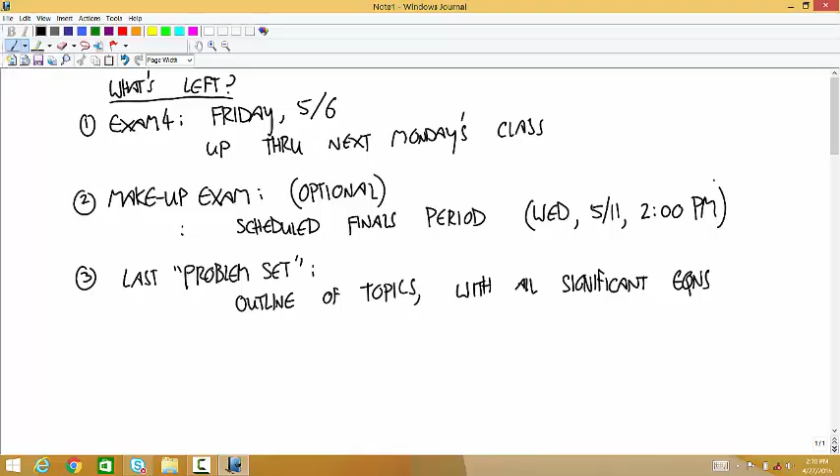Is it true that if we get 100% on exam 4, we don't have to retake anything? Yes, that is correct. If you get 100% on exam 4, there's no reason to do the makeup—basically you're going to replace your lowest score with 100%.

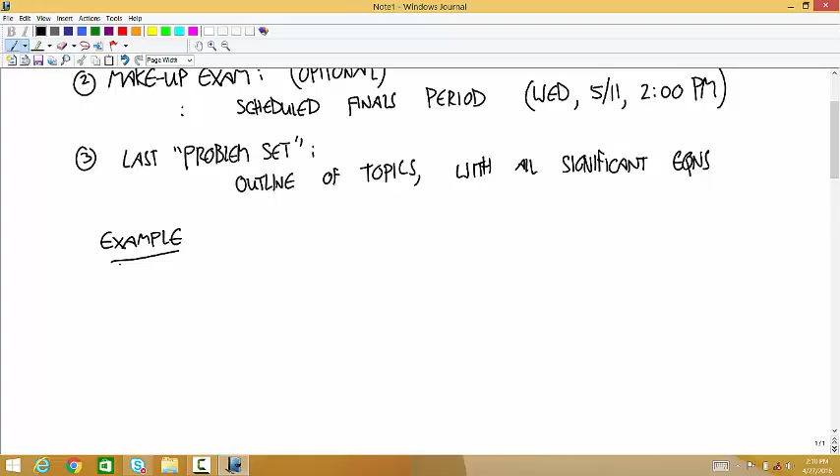So let's do the problem that I said we were going to do last time. We have this cantilever beam.

It has a distributed load of 20,000 newtons per meter, it's 1 meter long, and there's an additional support at the end. This is statically indeterminate because if you remove that roller at the end, it would still be statically determinate. That doesn't mean it would be a good idea to build this structure without that roller there—it serves a good physical purpose to keep this from getting ripped off the wall, but it's statically indeterminate because the roller's there.

Young's modulus is equal to 200 times 10 to the 9, and the area moment of inertia is 1.0 times 10 to the minus 7 meters to the fourth.

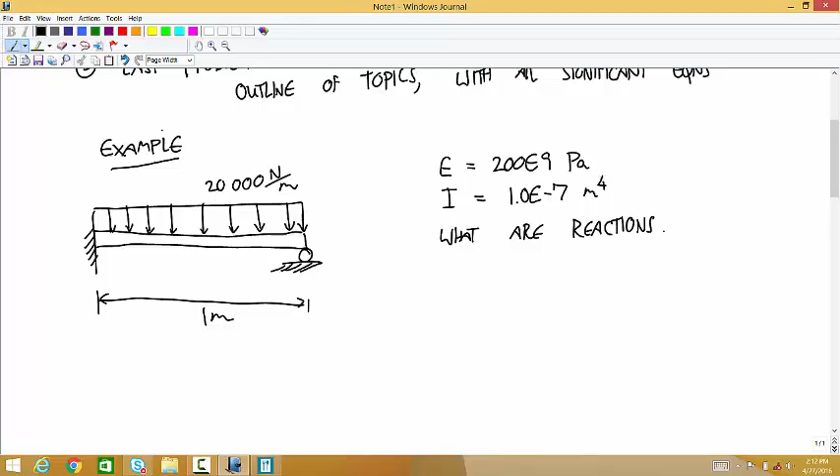What are the reactions? First, it's pretty easy to see with a simple problem like this that it's statically indeterminate, because you could do the statics if that roller was gone—so if there's an extra joint, it's statically indeterminate. But with a complicated machine or combination of members connected into a structure, it's a lot harder to spot. So your first approach is to try the statics, and you know it's indeterminate when you don't have enough equations to solve for all the variables.

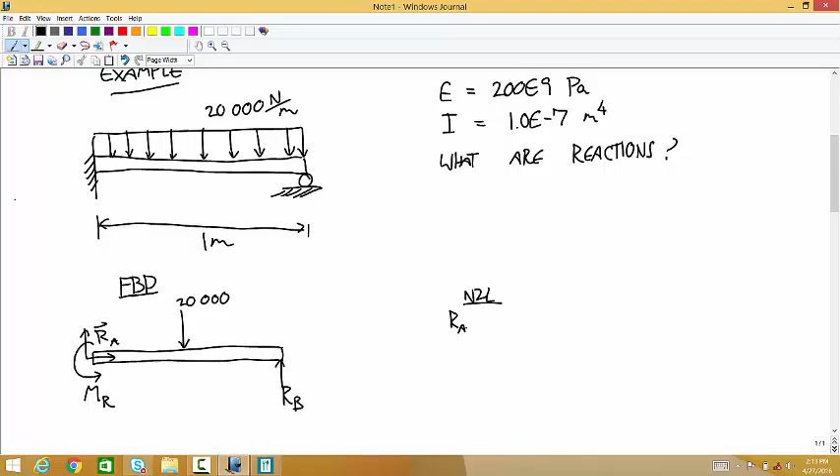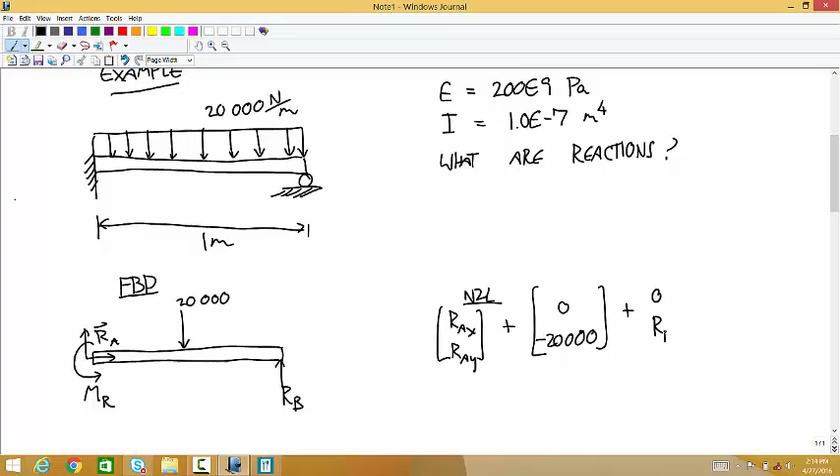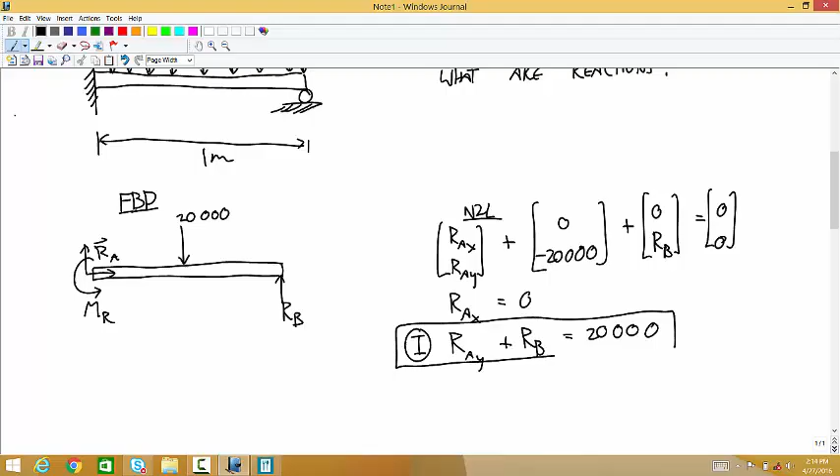So the statics of this: we have a force vector Ra, a couple Mr, an upward force Rb, and a total load force of 20,000. Newton's second law says Rax, Ray plus 0, negative 20,000, plus 0, Rb is zero. So Rax is nothing, but Ray plus Rb equal to 20,000 is a useful equation.

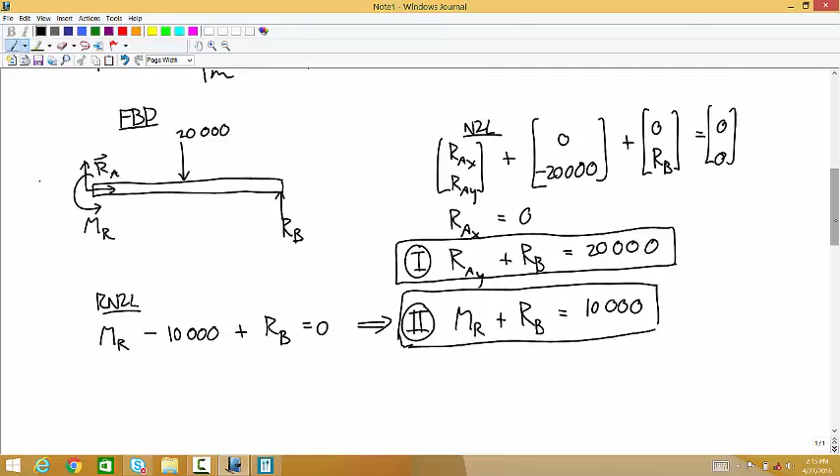Then we go to the moment equation: Mr minus 10,000 plus 1 times Rb is equal to 0, giving another useful equation: Mr plus Rb is equal to 10,000. Okay, so now all we have to do is solve that system of equations, and then we're done... 1, 2, no! That's how you discover that something's statically indeterminate.

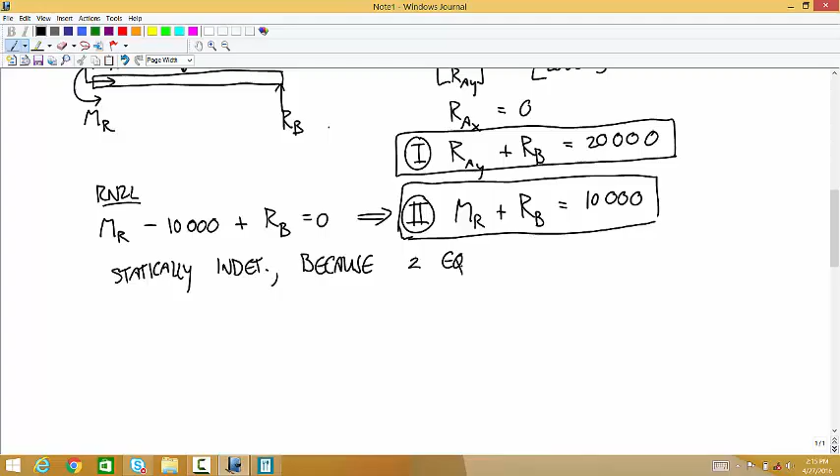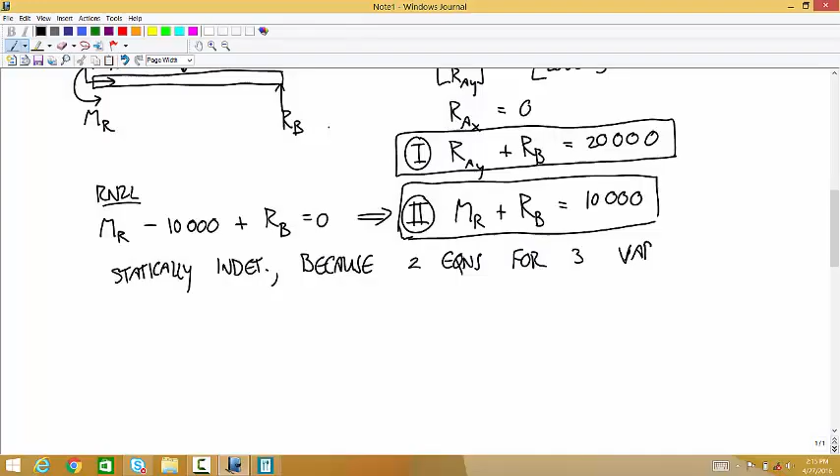So now we have to use constraints at the two joints—that's statically indeterminate because we have two equations for, let's think of it, 1, 2, 3 variables. Damn it.

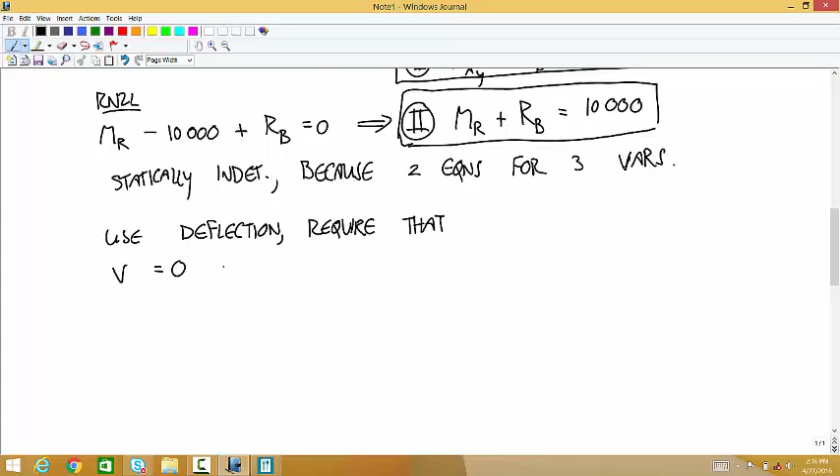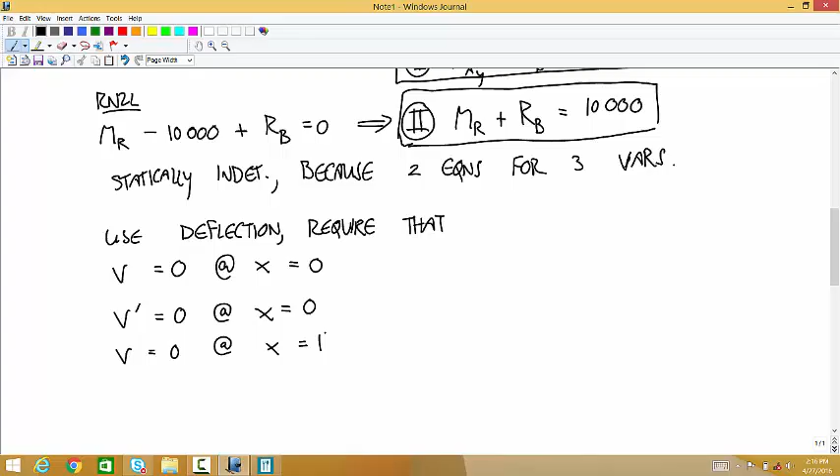Okay, so now we're going to use deflection and require that V is equal to 0 at x equals 0, V prime is equal to 0 at x equals 0, and V is equal to 0 at x equals 1. Does anyone have any questions about how I chose those requirements?

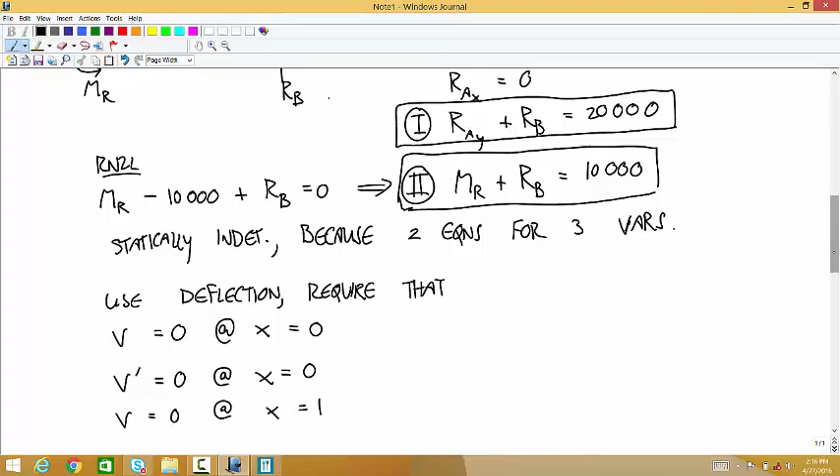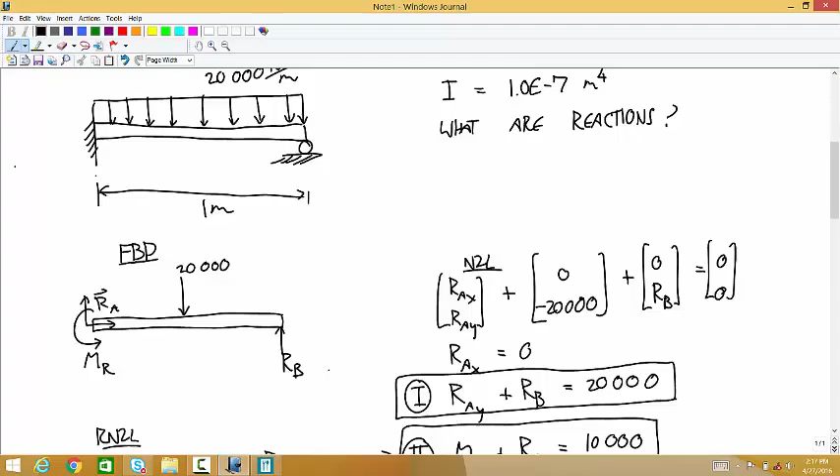That says that because there's a roller here, this thing can't move. And the fixed joint requires that it can't move, and also at that point its rotation is locked in by the couple at the wall—so it has to be horizontal for an infinitesimal distance outside of the wall too.

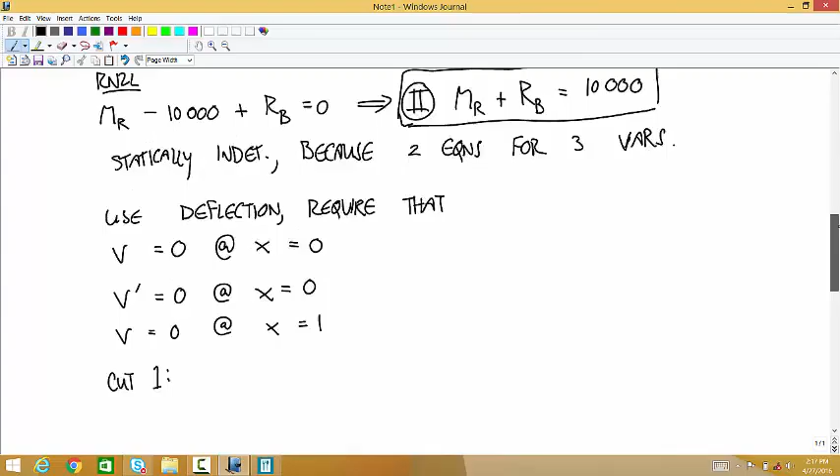Yeah, let's do it—that's the attitude I like. I bet Dan was like, do we have to?

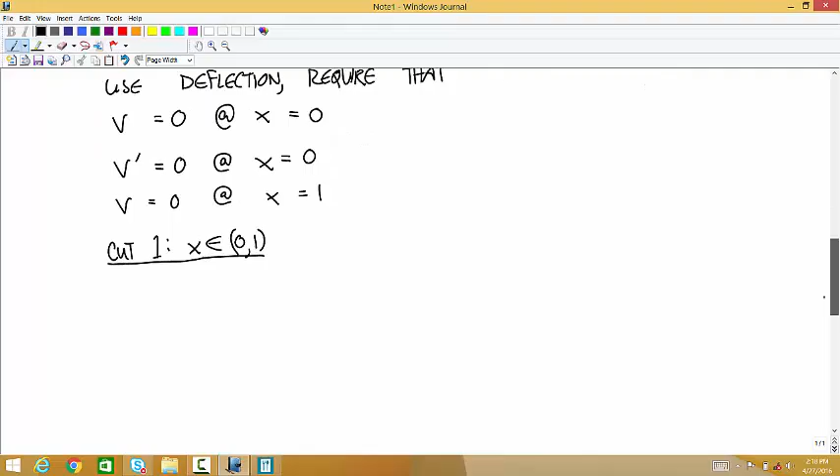Okay, so cut one. How many cuts do we need? Yeah, just one—between 0 and 1.

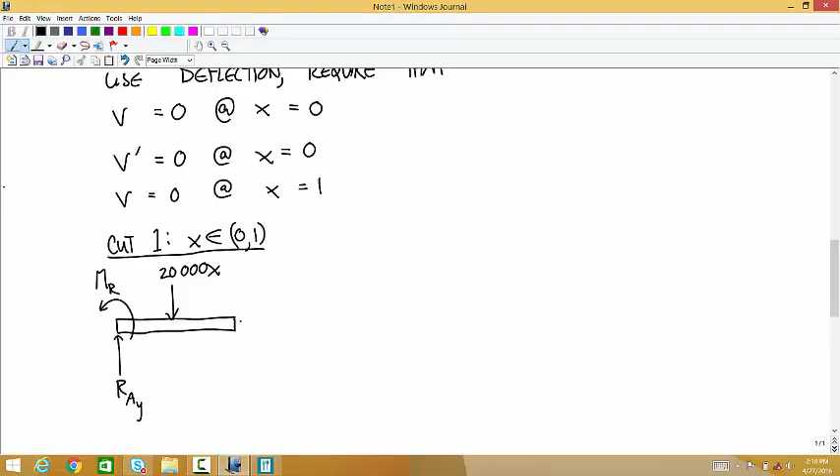We know there's no x component to the force, so I'm just going to write this as RA,Y and MR over here. The distributed load is 20,000 newtons per meter, so that's just a downward force of 20,000x at the midpoint, and then we have the tension, shear force, and bending moment.

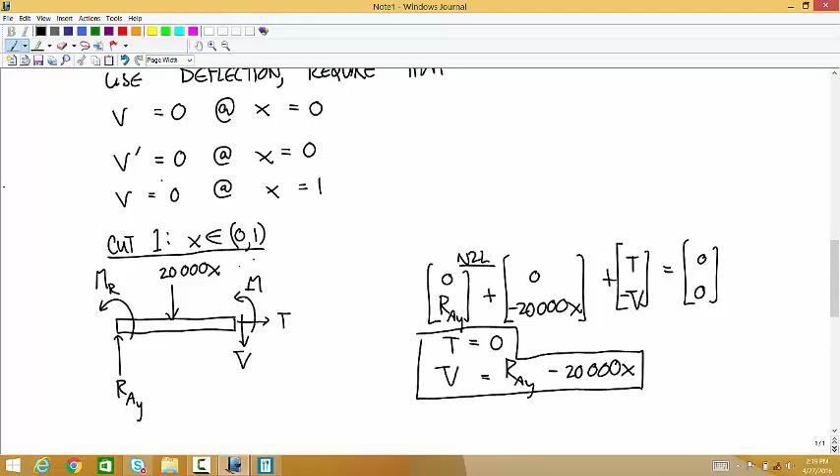Newton's second law says 0, RAY plus 0, negative 20,000x, plus t, negative v is 0. So t is equal to 0. And RAY minus v... what am I doing? Why would I do that? V is equal to RAY minus 20,000x.

And then the moment equation says MR. This has a moment arm of x over 2, so minus 10,000 x squared plus m minus Vx is equal to 0. So we want to solve for m: m is equal to negative MR plus 10,000 x squared plus Vx

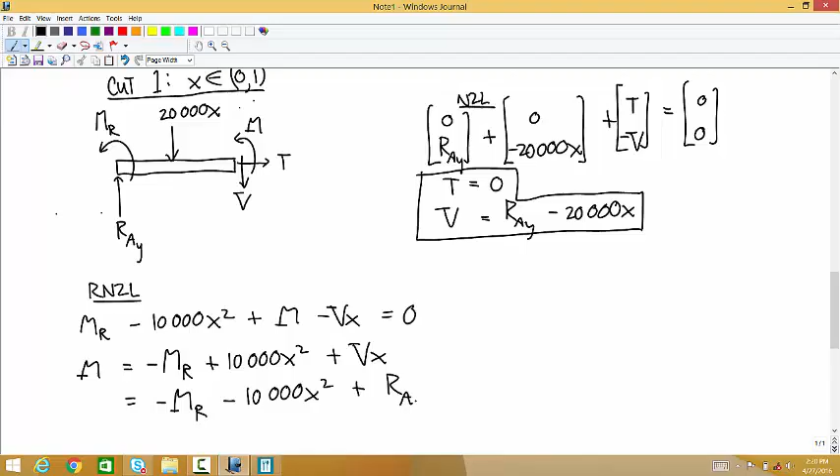And so we get negative MR minus 10,000 x squared when we combine the two x squareds, plus RAY times x, and that's it. Okay, and that's valid over the whole beam.

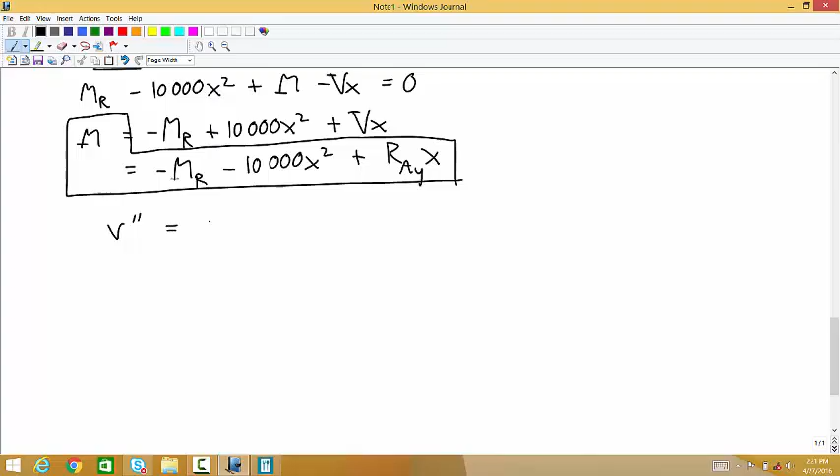The deflection equation says V double prime is equal to 1 over EI times the bending moment. So that's 1 over EI times all of this stuff: negative MR minus 10,000 x squared plus RAY times x.

Integrate this once and you get V prime is equal to 1 over EI times negative MR times x minus 3,333.3 repeating times x to the third, plus RAY over 2 x squared. And then there's one more thing we need: the constant of integration. Call that C1.

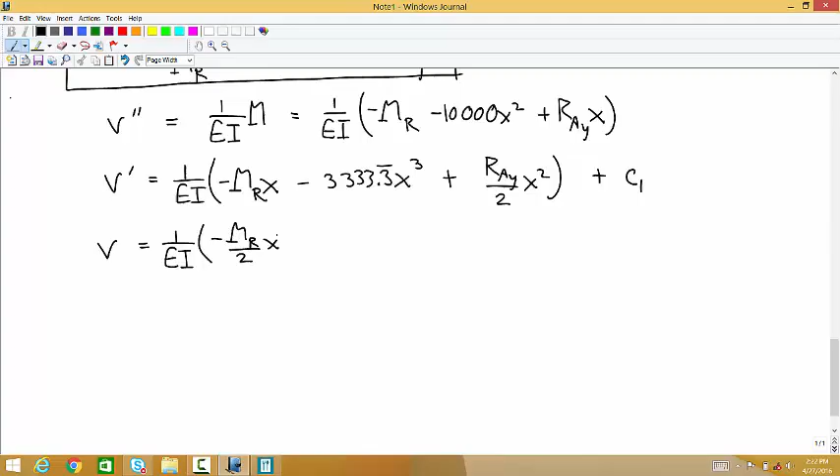And then integrate this one more time, and the deflection is 1 over EI times negative MR over 2 times x squared minus, what's 3,333.3 divided by 4? 833.3. Okay, minus 833.3 repeating x to the 4th, plus RAY over 6 x to the 3rd, plus C1x plus C2.

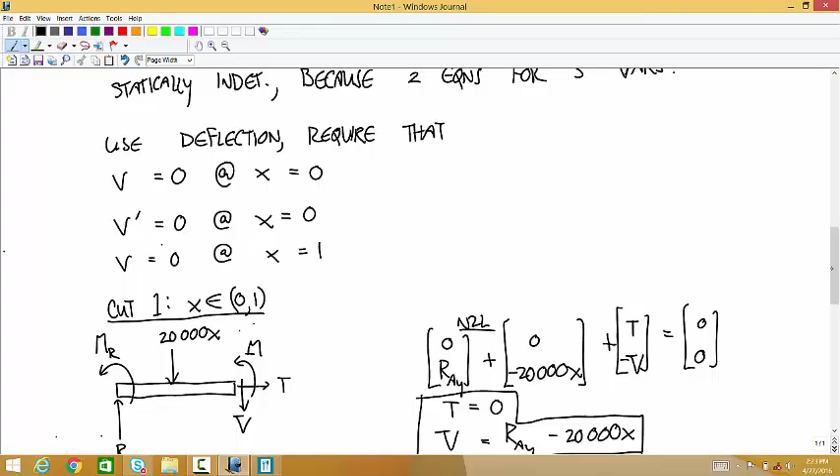So our first requirement, we're just going to go through - we have these 3 requirements for the deflection. The deflection has to be 0 at x equals 0, the slope has to be 0 at x equals 0, and the deflection has to be 0 at x equals 1. We're just going to go through those one by one.

So first, deflection is equal to 0 at x equals 1. V is equal to 1 over EI times 0 minus 0 plus 0 plus 0 plus C2. So C2 has to be equal to 0.

And now we can update our function for V. Question? You did at x equals 0? Oh, I did, yeah, sorry. It's hard to talk and think. Okay, so this is the one at x equals 0. And let's update our function for V.

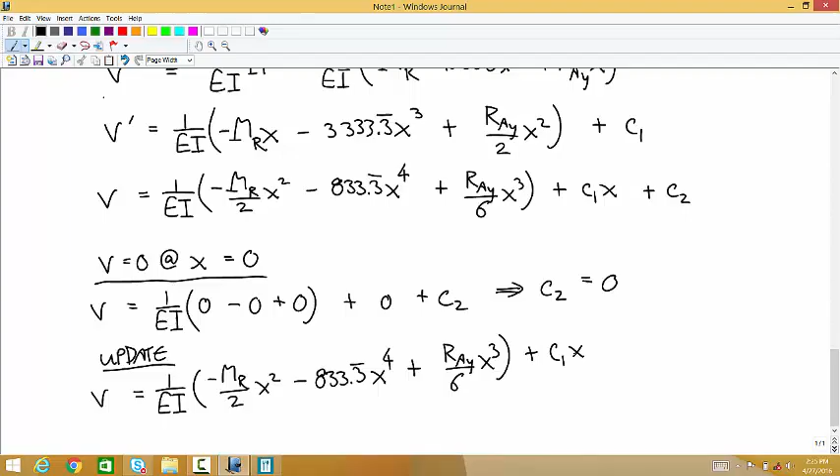V now is equal to 1 over EI times negative MR over 2 times x squared minus 833.3 repeating x to the 4th plus RAY over 6 x to the 3rd plus C1x. And there's no C2 anymore.

And now we're going to go to the requirement that V prime is equal to 0 at x equals 0. Well, we already, on the way to getting V, came up with an expression for V prime. All of the terms in here have x's multiplied. So V prime is equal to 1 over EI times, I forget how many zeros there are in here, but a few, plus C1. So C1 has to be equal to 0.

And now I'll update this function. So our most current expression for the deflection is 1 over EI times negative MR over 2 x squared minus 833.3 repeating x to the 4th plus RAY over 6 times x to the 3rd.

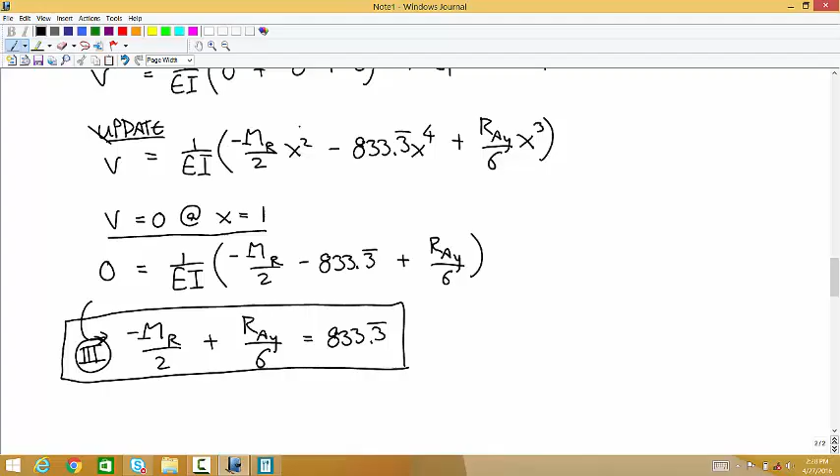So now we can use this expression as our third equation in our system. Multiply both sides by EI, and you get that negative MR over 2 plus RAY over 6 is equal to 833.3 repeating. So that's our third equation.

And now we have three equations for three unknowns. So let's calculate this.

So here's equation 1, 2, and 3. Here's variable 1, 2, 3. I'll put it in the order RAY, MR, and RB.

We solve for shear, right? Internal shear? Yeah. But then that does come into play for the moment, huh? It comes in with the moment. That's right. But yeah, for the deflection, you do it all based on the internal moment. So we haven't done any macroscopic deformations that explicitly use the shear force. But yeah, the bending moment and the shear force are closely related through that derivative relationship.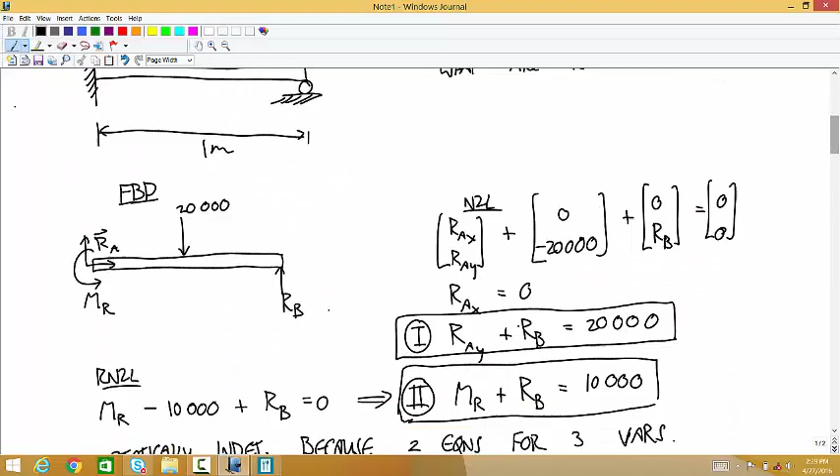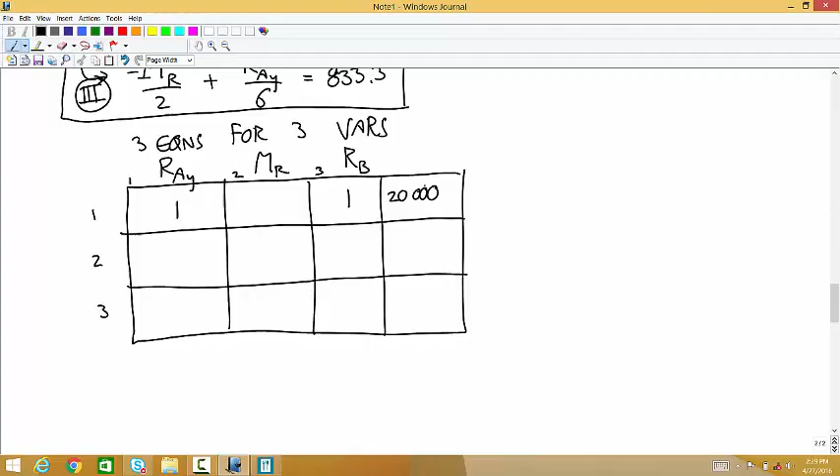Okay, so what does the first equation say? Roman numeral 1 up here. It's a long problem. RAY plus RB equals 20,000. So one of those, and the constant is 20,000.

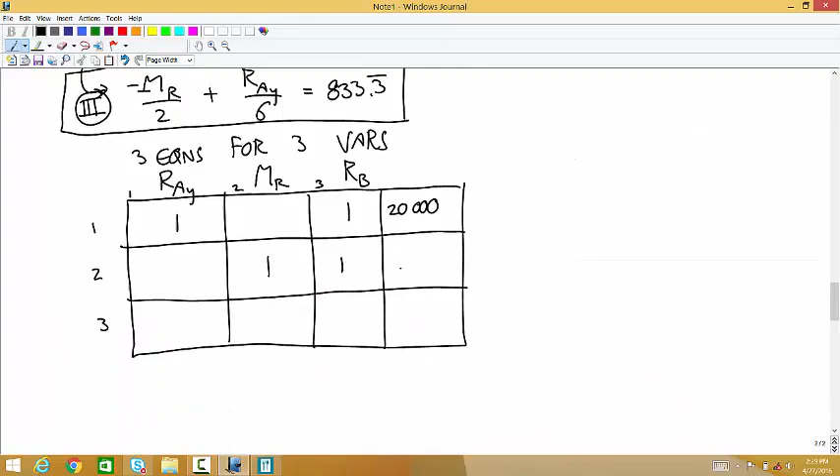The second equation says MR plus RB equals 10,000. And the third one says negative 0.5 MR, 1 over 6 RAY. What's 1 over 6? 0.16 repeating. Okay. And then the constant is 833.3 repeating.

Can someone solve that system? I got RAY equals 12,500. Okay. MR 2,500. Okay. And RB is 7,500.

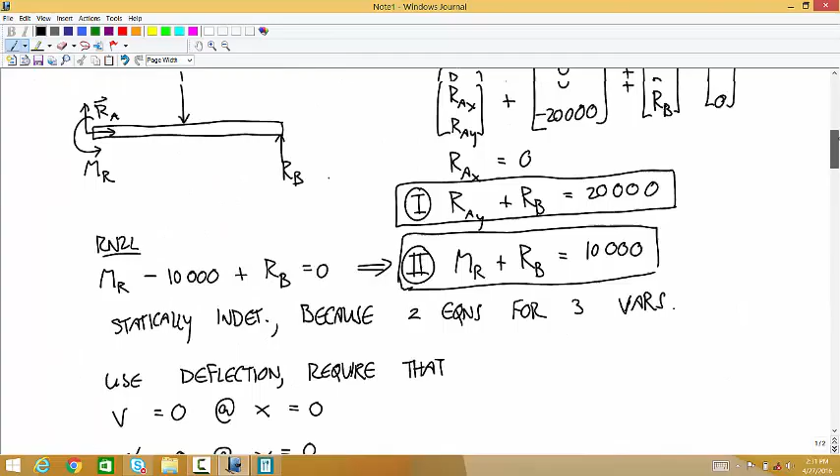Newtons, Newton meters—yeah, I would like if you put units. I'd like if I did it too. So yeah, that's cool.

Now we have this problem where you'd think the loads could be distributed in any way, but because of rules of how the deformation happens, we figured out how they're distributed. That's the idea of statically indeterminate systems. So if you had the same type of problem, but instead of one roller you had two or three, you'd solve it the same way as you did right now, except it's going to take you longer.

Yeah, if you had more of them, I assume you could do it the same way. You would have more constraint equations, but also more variables. So if you had 4 rollers along the bottom to support it, at each one of those rollers the deflection would have to equal 0. But you'd also have all those additional forces from the rollers.

And so in the end you'd get a system of a lot more equations and a lot more variables that you could solve. So it's like coming full circle—before going to internal loads, it didn't seem like you'd ever use them to solve external loads.

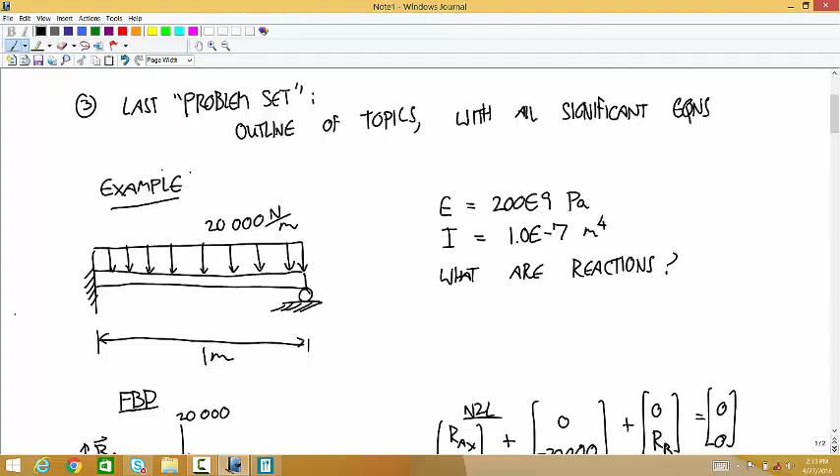So say we wanted to know the deflection at the midpoint—we can just plug it into the V. That's right, we have the function. So now for any x value you can find the deflection.

Notice that, so do these values depend on the material? Well, in this case we saw that it doesn't depend on the material at all, because that EI just canceled right out of it. We would have gotten the same answer no matter what these are.

But then if you want to find out how much it's deflected at the middle, that EI is going to be important. And if this is made out of rubber, you'll get a very different answer than if this is made out of steel.

Also, don't do calculations with rubber with any of this stuff, for two reasons. The deformations get too big, too fast. And also, the relationship between stress and strain is never linear for rubber—if you look at its stress-strain curve, it doesn't have any linear region.

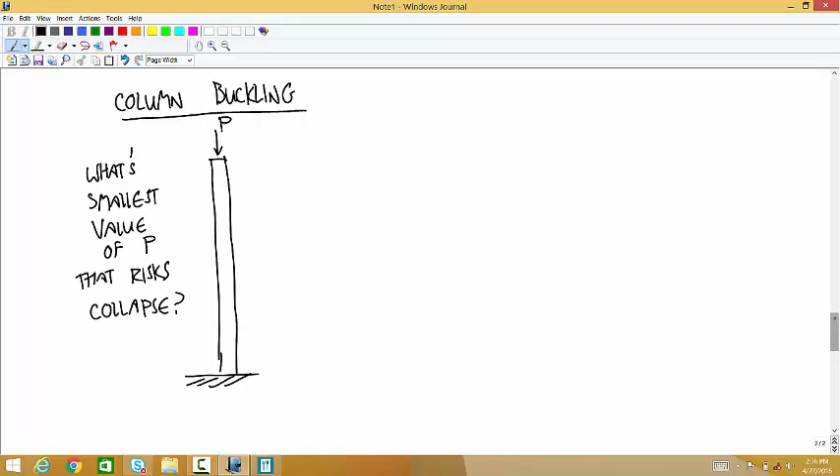We're going to think about a few different ways that the ends can behave. I'm going to always draw it horizontally because that's how we're more accustomed to thinking about this. I'm going to draw it like this. Let me draw that a little differently—let's think of this as a roller over here and a roller over here.

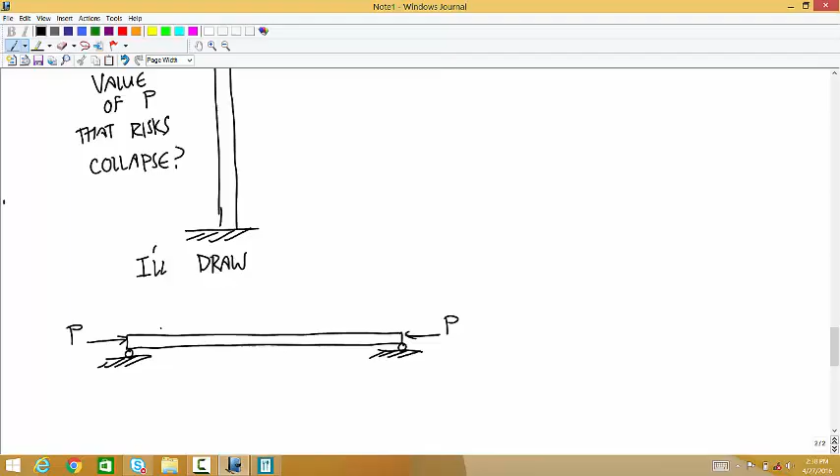And we're talking about loads P this way and P this way. The question we're answering now is very different than what force in the opposite direction will make this thing rip apart. We're not asking that question here. We're just asking: at what point are we in danger of this bulging up and smashing together? So this is only a compression-related thing.

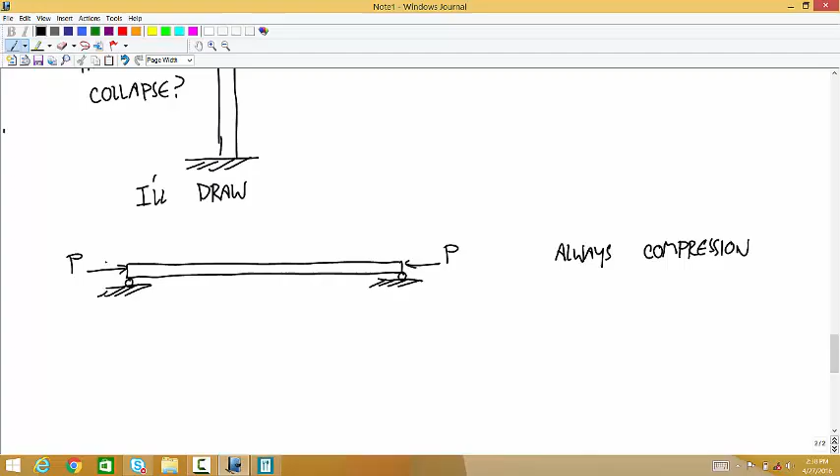Okay, so first of all, do you understand the distinction between what we're looking for here versus, like, a tensile test, where you're seeing how hard you can pull on something before it rips?

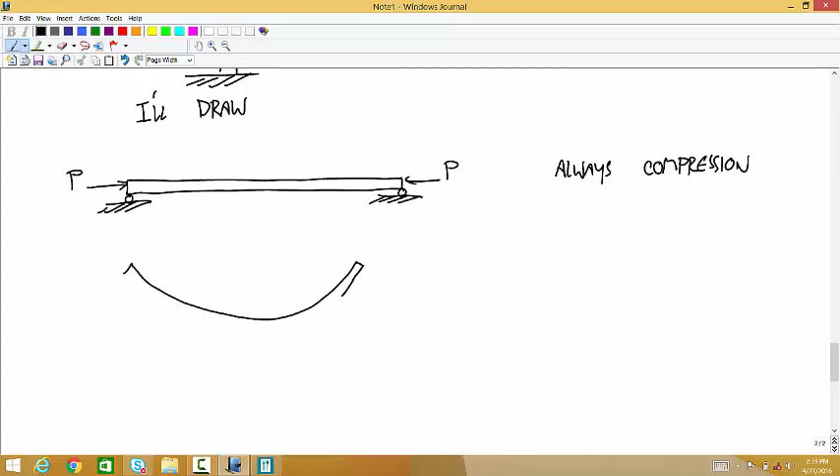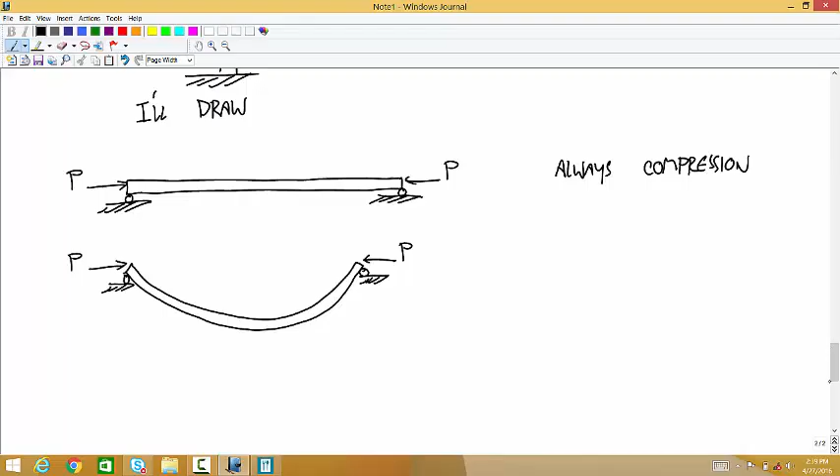So what this is going to do is—here's how it's going to fail. This is an exaggeration of the deformation. But at some value of that compressive force P, any little bulge out that this material makes becomes unstable, and the force is enough to push it out into this big deformation, and that big deformation is enough for this to break.

So how can we figure out what that critical value of P is?

Is this type of thing only for solid columns? For solids or also hollow tubes, if you're talking about columns? Yeah, this also works for hollow tubes.

Okay, so think about just a part of this column. I'm drawing it with the deflection happening downwards, so this distance would be negative v. Statics says if this is the part we're isolating, this is a free body diagram, this load has to be P for this to be in equilibrium.

And those two forces can't be alone for this to be in equilibrium, because what would happen to this object? It would spin. So we need a bending moment applied by the material that we've left off on the right to keep it from spinning. So what direction would that bending moment have to be acting, the way I have it drawn?

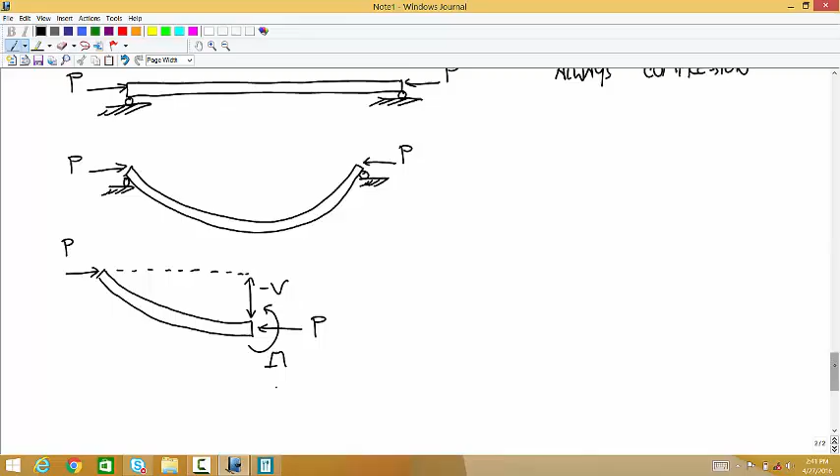So now you can sum the, think of rotational Newton's second law. What we have is that negative P times the deflection produces a clockwise moment. So if we're adding up counterclockwise moments, it's negative PV.

And so P has to be equal. Let me write this a little differently. So what's the moment produced by this couple P and this distance v? So that would be negative PV, right? Yeah, okay, so negative PV.

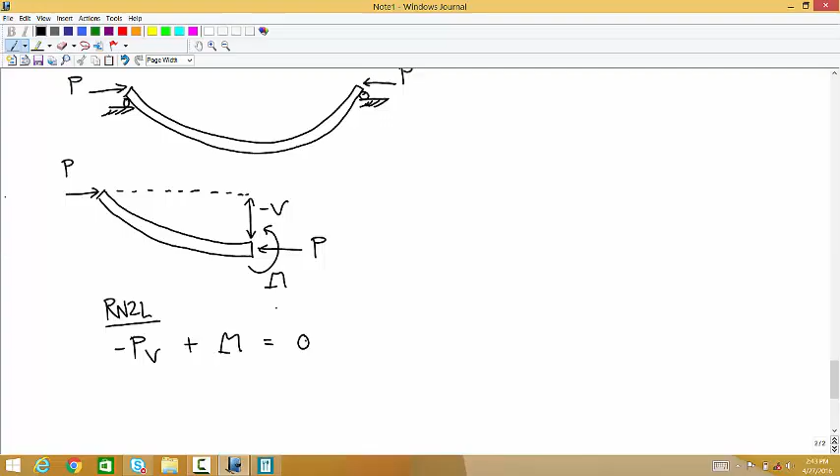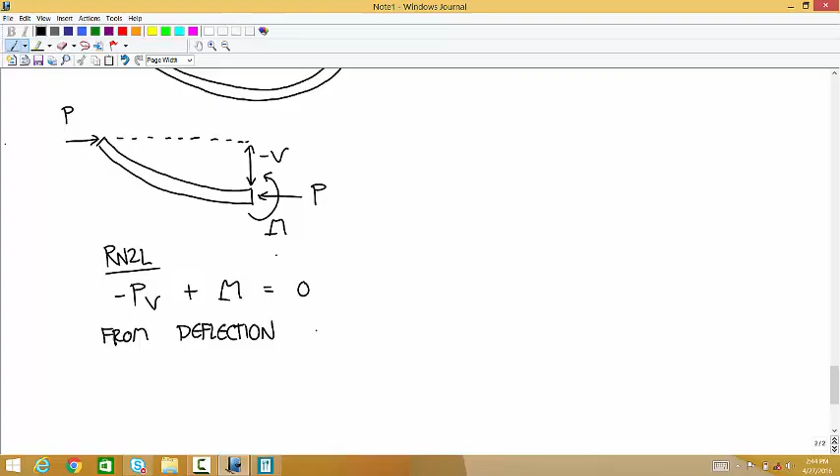Plus this bending moment has to be equal to 0. And that bending moment comes directly from our deflection analysis. That bending moment has to be equal to... I'm getting a negative sign here, I shouldn't. It should be equal to EI V double prime.

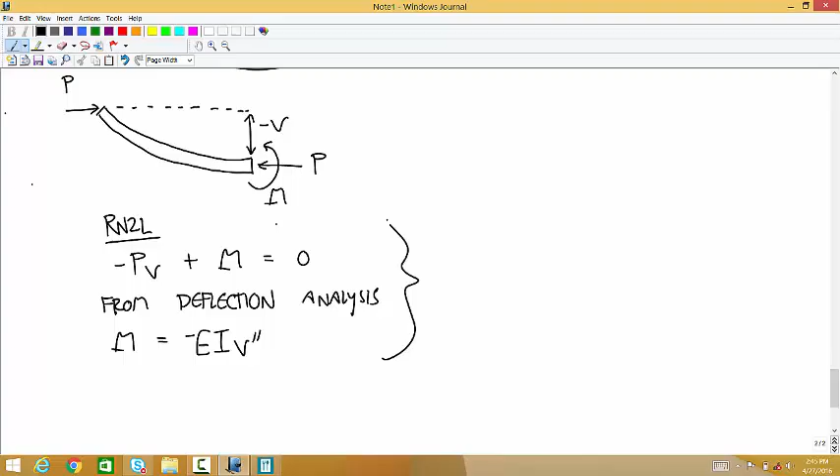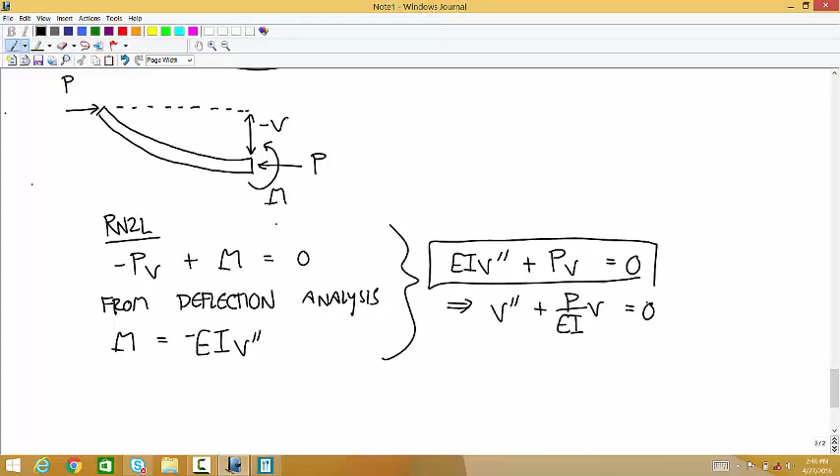Okay, well, I'm gonna have to find this later, but somewhere either this should be positive or this should be negative, and these two together give us this equation: EI V double prime plus PV is equal to 0. And that's the starting equation for this buckling analysis. So you can think of this as a differential equation that says V double prime plus P over EI times V is equal to 0.

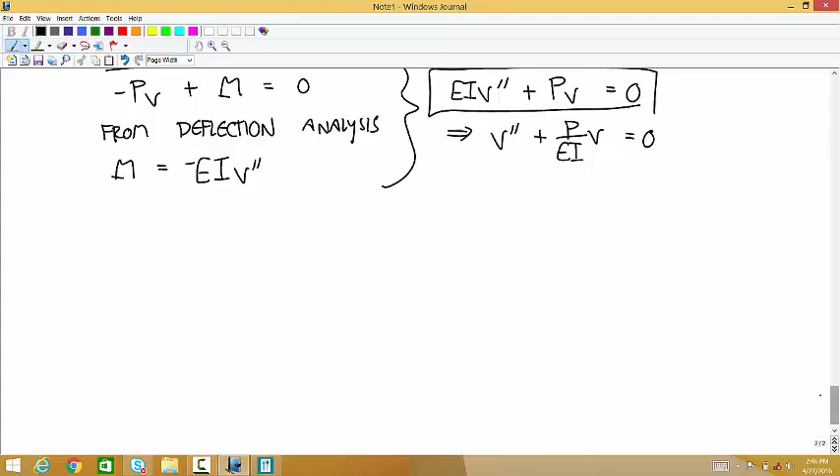How come the moment is positive? I don't know, I'll have to think about that later. Should it be negative, the M? Oh, I think, so if V is negative, and then the moment is also negative, those two negative signs would cancel, so it would just be PV. So V would be... you're right, yep, you're exactly right. So this should be positive.

This should be positive. Okay, so we start with this differential equation. You've seen an equation like that probably before in Physics 1, at least briefly. Anybody know what the solution to that looks like, generally? To this differential equation?

You gotta do the chart probably. The what? The characteristic polynomial? No, we don't have to do that for this relationship.

If you have a second derivative of your dependent variable plus some constant times your dependent variable, the solution is a sine and cosine solution. So your general form is like v of x is equal to some constant times the sine of square root of P over EI.

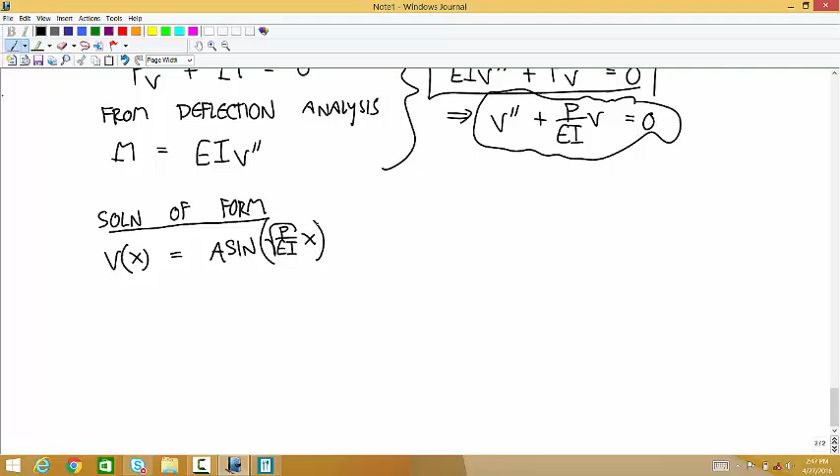Yeah, you get that from doing that characteristic polynomial. And then like that one's in it, you can't just factor it, so you use the quadratic formula. I think you get like an i in your answer. Okay, and then it's weird how you apply it. Okay, yep, right.

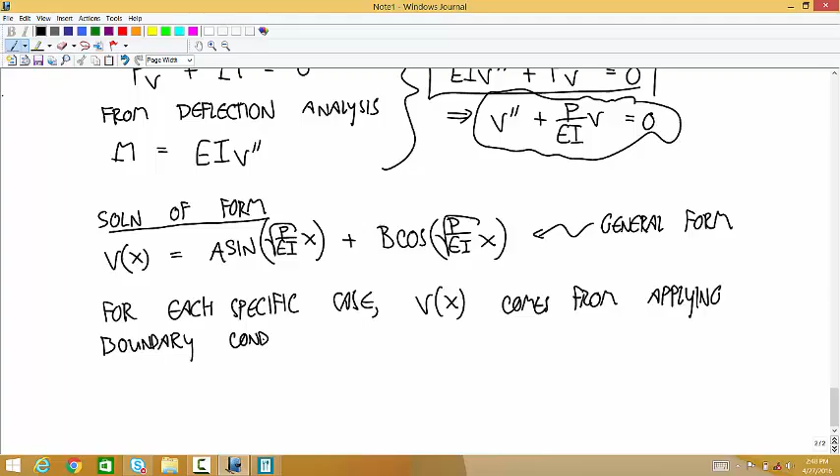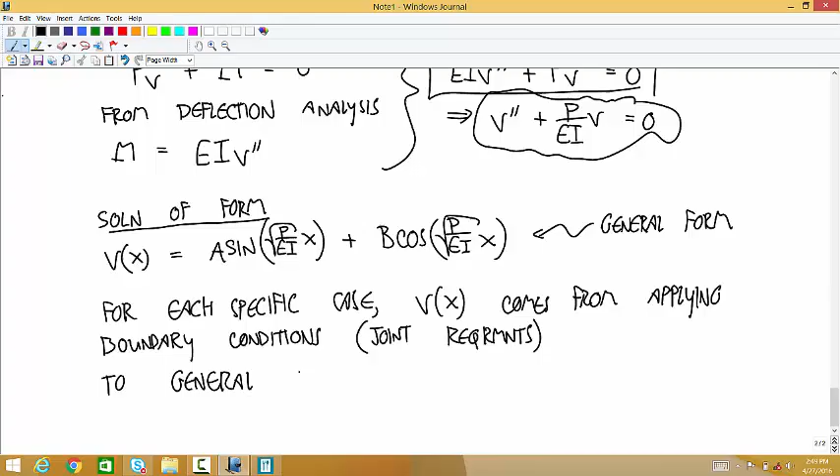Okay, so this is the general form. And then the function for our specific case, for each specific case, the function v of x comes from applying boundary conditions, and those boundary conditions come from the joint requirements at the ends, to the general solution.

Okay, so for example, the joint requirements at a pin, V has to be equal to 0. At a fixed joint, V has to be equal to 0 and V prime has to be equal to 0.

And so everything that we're going to build up from that general solution comes from applying these requirements and using those to solve for the constants A and B. Okay, and then solving for, eventually we're going to solve for this load P to find the critical value that's going to cause buckling.

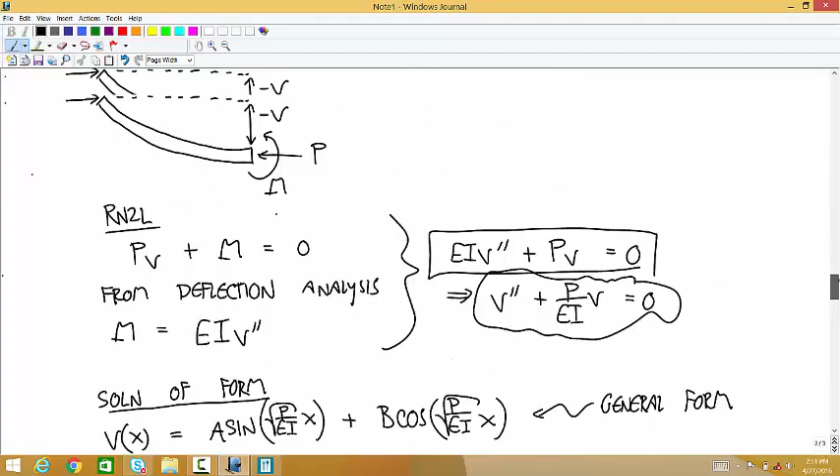But these boundary conditions, notice, that's a very similar approach to deflection problems. We come up with this general solution, and then we look at what kind of deflections the joint allows in order to solve for our constants that are unknown. Okay, any questions about that?

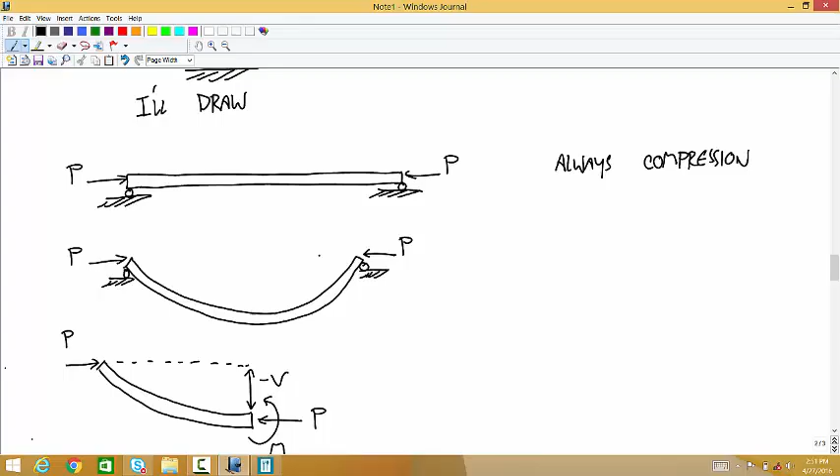So next time, the one that I'll start with will be the one that I drew up here, where we have pin joints at the two ends. And so all we know is that the deflection is equal to 0 at this end and deflection is equal to 0 there. And then we'll go from there to other combinations of joints.

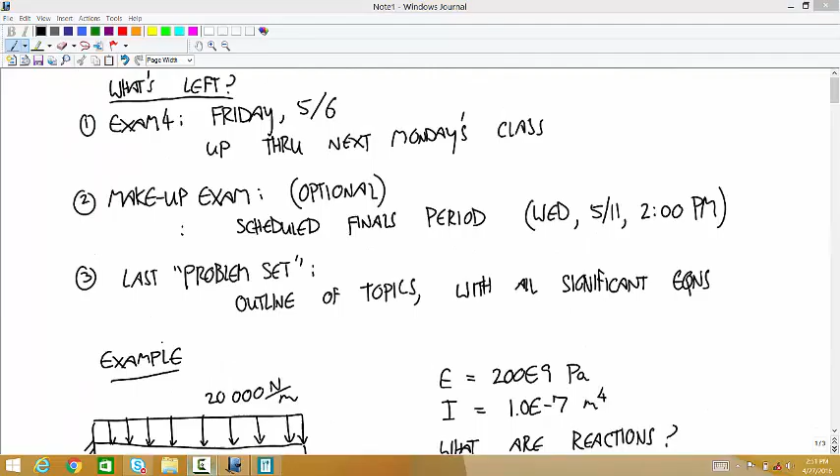Can you scroll up all the way? All the way?